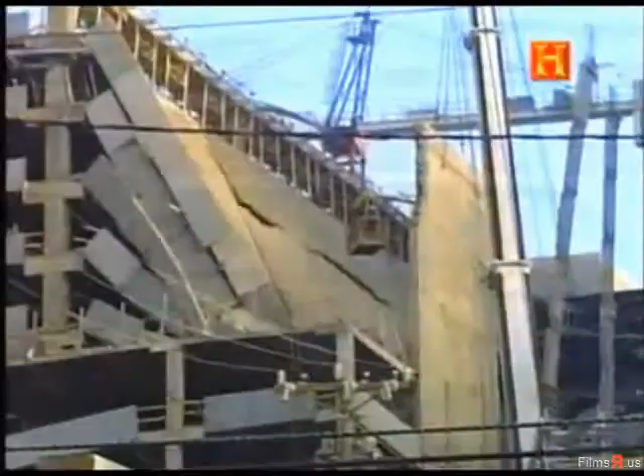A small town spontaneously combusts. A tanker explodes, taking lives and leaving ecological disaster in its wake. A parking structure mysteriously collapses. The dream project of a Soviet strongman turns into a nightmare, and a cloud of gas leaves a landscape of death. Now, engineering disasters.

January 17th, 2001, dawned chilly in the city of Hutchinson, Kansas, a town of 40,000 located near the geographical center of the United States. Then, all hell broke loose. Two buildings in the heart of town were slammed by an explosion and burst into flames, the force shattering glass a block away, and the flames sending smoke twisting over the city.

One store manager will never forget that day. The last thing I remember was like a rumble, like thunder, and I looked up and the ceiling tiles were all falling down. The next thing I knew, I heard sirens. I was buried in it. When we came back, we were still in shock, couldn't believe that it had happened. Our building wasn't there. There was just a huge geyser of a fire, just out of control.

As firefighters worked to douse flames that reached as high as 70 feet, city officials could only guess at what might have caused the explosion and fire. We thought it was just a normal explosion due to, it was cold that day, that maybe some furnace malfunction and there was a leak in the gas.

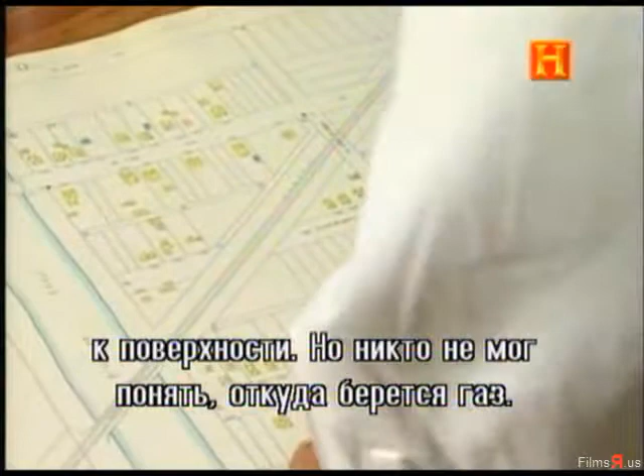But no one knew where the gas originated. We were plotting the wells that were flaring up to see if there was a pattern, if they would form some kind of a line to show us where the source was at. And it indicated to us it looked like there was a source maybe coming from the west of town.

Outside Hutchinson is the Yaggy gas field, an underground storage facility. It's one of the hubs in the national gas storage and transportation system. There are fewer than 24 of these hubs around the country, so they're very critical parts of the natural gas infrastructure. Gas comes in by pipeline, and then it's sent from here out on distribution lines all over the Midwest, connecting up with the national grid.

The Yaggy storage field, which holds about 3.5 billion cubic feet of gas, was first developed in the late 1970s to store liquid propane at low pressure. At that time, engineers created about 70 long-necked gas storage holding areas, known as jugs.

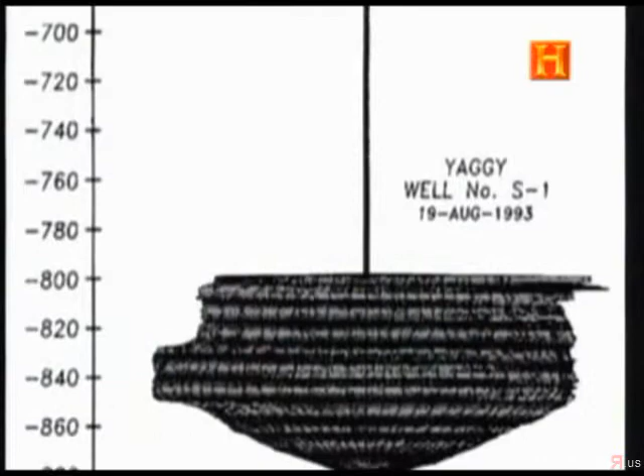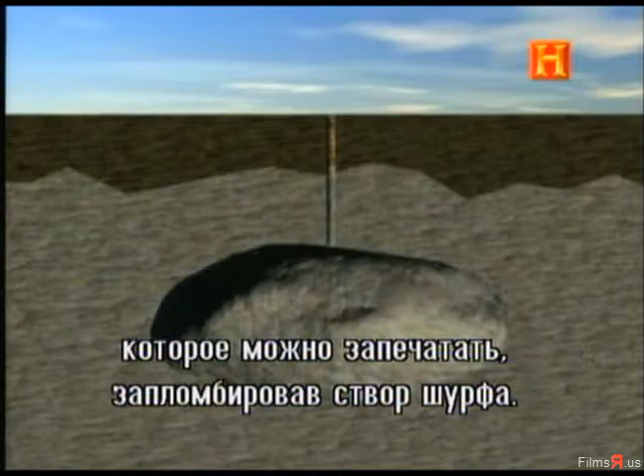To create a jug, engineers drill about 600 feet down into the salt deposit and then use water to dissolve the salt and make a man-made cavern. Then the water is pumped out, leaving a stable storage place that can be sealed by cementing around the well casing. These things are large enough to hold about 100,000 barrels of fluid, 42 gallons per barrel. That's 4.2 million gallons of fluid in one of these jugs in the salt.

About a decade later, the company that made the jugs went out of business, and the local gas company converted the facility to hold natural gas at high pressure rather than liquid propane at lower pressure. The change was significant because higher pressure storage requires that the jugs are perfectly sealed in order to prevent leaks.

Investigators believe that just before the explosions in Hutchinson, there was a pressure drop in the gas stored in a jug designated S1. This suggested the gas had exited the jug, but investigators still needed to know where it went and how it might have traveled the 8 miles to Hutchinson.

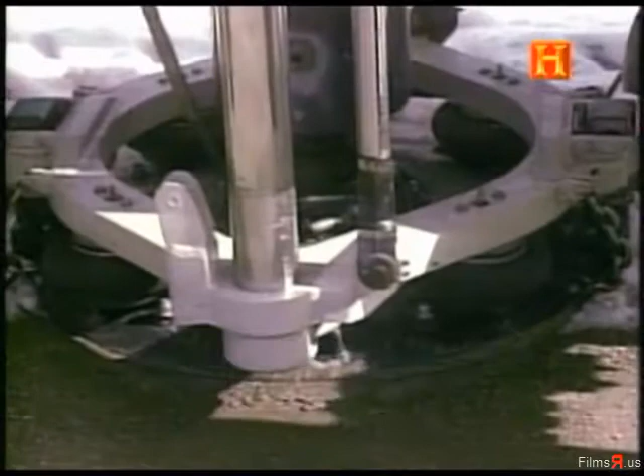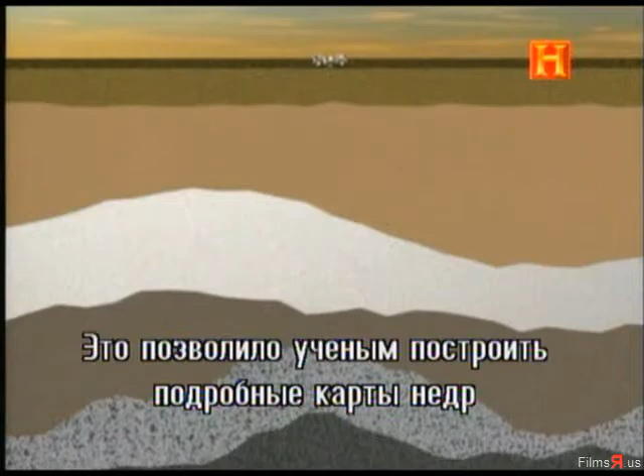To answer that question, geologists from the Kansas Geological Survey deployed what are known as seismic thumper trucks to create maps of underground conditions. A thumper truck works by literally thumping the ground to send shock waves into the earth. These are bounced back to the surface with varying degrees of intensity, depending upon the nature of the material they encounter below.

This enabled scientists to make detailed maps of the region between the city of Hutchinson and the Yaggy Field facility. Right here it looks fairly flat, but underground, 600 feet down, the rocks are dipping, slowly inclining towards the city of Hutchinson. Natural gas gets out into those rocks. It comes out of the well, out of the jug, hits that rock layer, and wants to find the highest place — it wants to rise to the top. So it found this rock layer, found a pathway, and headed straight that way for 8 miles right under downtown Hutchinson.

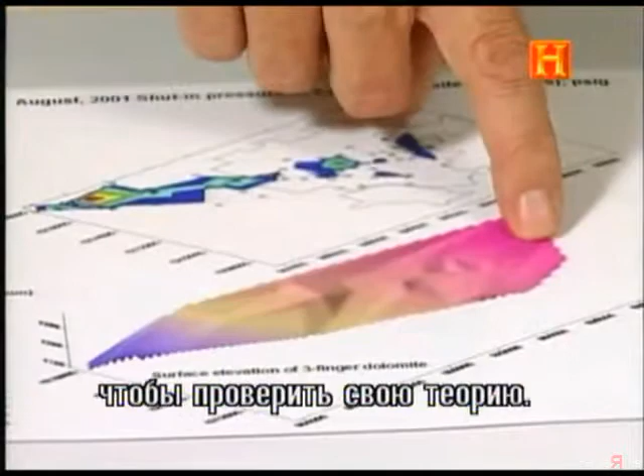Scientists generated geophysical maps of the underground pathway to validate their theory about the gas. They came to believe that the gas leak started in the S1 jug. To confirm this, investigators photographed the inside of the jug and discovered that the steel casing running down into the salt cavern was damaged, allowing the high-pressure natural gas to escape into the ground.

Investigators claim that even though there was a pressure drop at Yaggy Field, operators either ignored it or didn't detect it, and kept topping off the jug, keeping the high pressure constant.

While gas company engineers still seek other sources for the leak that ignited Hutchinson, most independent investigators agree that the Yaggy Field is the most likely origin.

The field is inactive now. Most of the gas has been distributed out in pipelines and sold to the market. There's about 20% of the gas left as a cushion at relatively low pressures to keep the system alive, keep the caverns open, and keep the equipment running, while the company decides whether they want to apply to reopen it. Following the Hutchinson disaster, state laws were passed requiring salt caverns to be built and maintained with higher safety standards.

There's also a concern that it happened once. We still don't know all of the things that went wrong, and there still may be other pathways for gas that we've never discovered. So I think there's always going to be a reasonable doubt in many people's minds about living uphill from a facility this large with this high pressure gas.

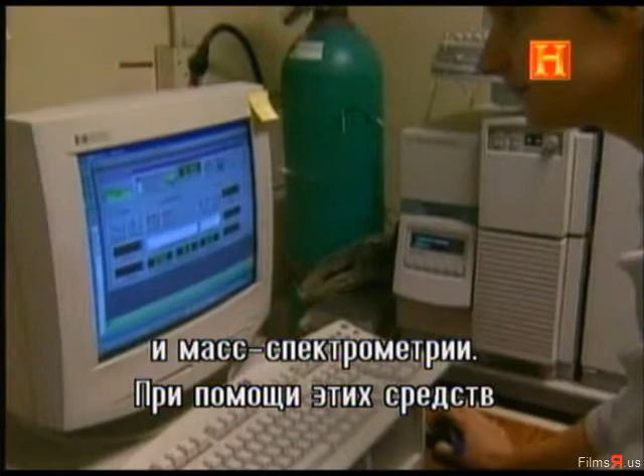There are several investigatory tools that are very powerful at identifying for us the very molecular and atomic constituents that led to that soot. The most powerful tools we find in this endeavor are some combination of gas chromatography and mass spectrometry. What these tools basically do is you take a complex chemical mishmash like soot, and you break it into its constituents so you can identify them individually.

The analysis revealed that one of the compounds involved was caustic soda. By itself, caustic soda is not explosive. But as investigators would learn, it leaked from the holding tank, combined with other elements, and formed a dangerous brew.

Investigators went inside and found a hole at the top of the tank, a problem they believed occurred because one of the welders who made the tank didn't seal the seam completely. The hole burned through the tank was actually easier to find than you might think, because large expanses of a tank wall are just flat, featureless.

If you're in this business very long, you recognize that problems in workmanship don't typically come up in long, straight areas that are easy to weld. Problems in workmanship usually manifest themselves in complex, cramped geometries around corners and struts, in a place that's not so accessible and not so easy for the workman to see his work.

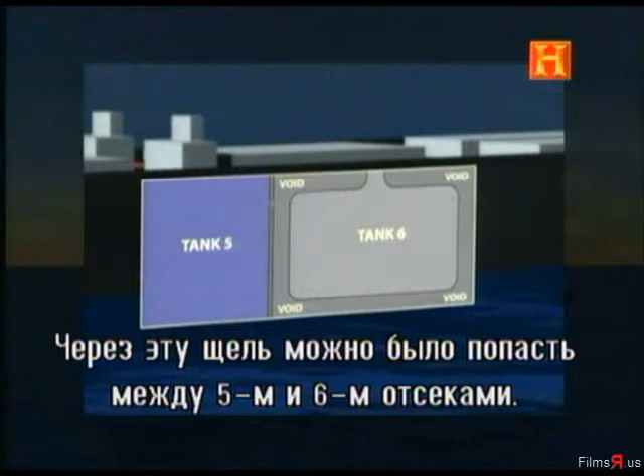The hole in the tank was enough to provide passage into a void area between Tank 5 and its neighbor, Tank 6. Eventually, the bilge space became filled with a soup of caustic soda from a preceding voyage. This caustic soda soup combined with a zinc coating used in the bilge area and formed hydrogen gas. Then the hydrogen exploded, ignited by a spark of unknown origin.

If hydrogen finally builds up in concentration to its lower explosive limit, it will find an ignition source. Remember, this is the same stuff in the Hindenburg. So we have this incredible conjunction of events. And indeed, in our business, we see that major disasters are very often the result of a string of very low probability events that just all come together bad that day.

The Puerto Rican tanker explosion had implications for the U.S. Coast Guard, which improved its response to hazardous materials spills.

And although authorities acknowledge that the explosion was a freak accident, the disaster did create change in the shipping industry. The Marine Board of Investigation suggested that there were preventative measures that could have been taken to prevent this explosion in the first place. Better inspection techniques, perhaps during the yard period, or other opportunities the vessel had to be inspected, may have found this gouge and it could have been repaired.

You've got to start looking for things like if volumes of cargoes start disappearing during voyages, and in this particular case they were. This cannot go without some affirmative action. Indeed, it would be very straightforward to determine you've got a leak because cargo is showing up in the bilge water. If those determinations had been made, the leak would have been located. It just would have been a matter of time.

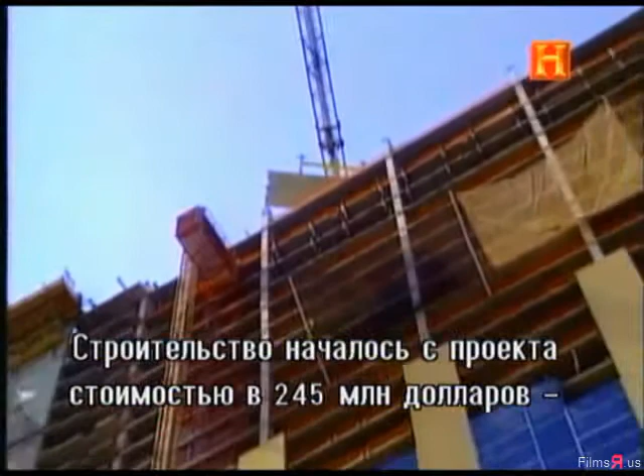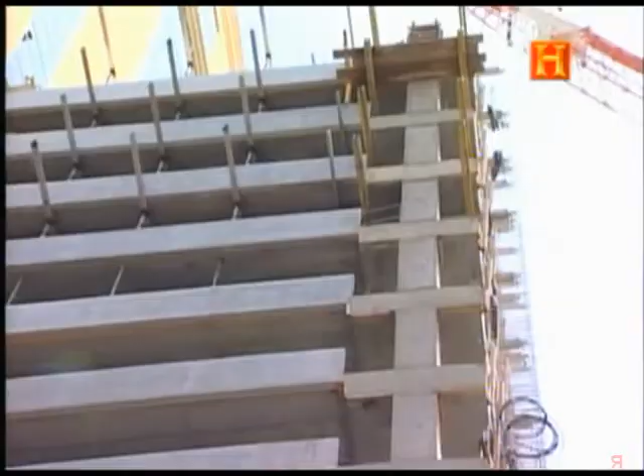The Tropicana organization stepped in with a new development intended to lure more gamblers to the Jersey shore. Construction began on a $245 million project, a new 18-story hotel next to the Tropicana Casino, as well as an attached 2,400-space parking structure. It was one of the biggest projects in Atlantic City in a decade.

Local officials and Tropicana executives were saying how big this is going to be for the area. It's going to be the largest hotel in the state of New Jersey. It's going to bring jobs to the area. It was of critical importance to the city, the state, and the casino. It had the economic fortunes of workers and businesses tied to it.

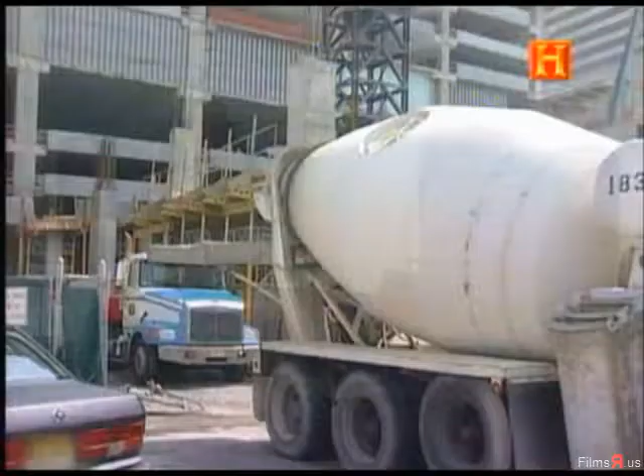Feeling the pressure, contractors put the Tropicana structure on a rush status to complete the work by March 2004. On the morning of October 30th, a work crew was 8 parking levels up, preparing to pour concrete.

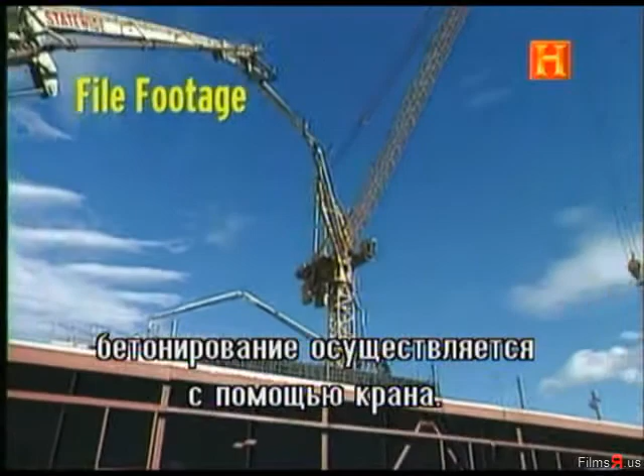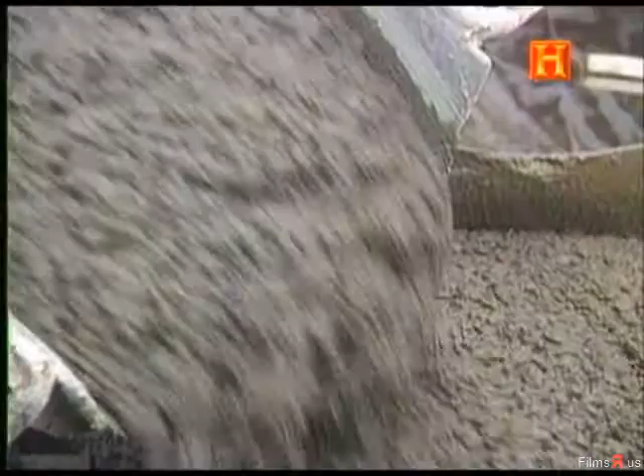On many construction sites, this is done by means of a crane-mounted hose. In the old days, workers would haul up concrete in buckets or wheelbarrows. It's become much more modern these days. It's pumped: a pump takes it up through a tube and then out through a hose, so you could place it 8-9 floors high. Wet concrete puts great stress on structures.

In the case of the Tropicana, engineers estimate that stress rose to 160 pounds per square foot on the framed-out floor area while the concrete was being poured.

At about 10:40 in the morning, workers knew that something was wrong. They hear a noise and something shift. Some of the men have described it as just sort of looking at each other like, did you hear or feel that? And then everything begins to collapse and fall in.

Within moments, 5 floor slabs collapsed progressively.

They severed from a shear wall that remained standing after the collapse. When it cracked like that, I just went straight down. And it's like flying—I'm just floating in there, reaching, trying to reach for something.

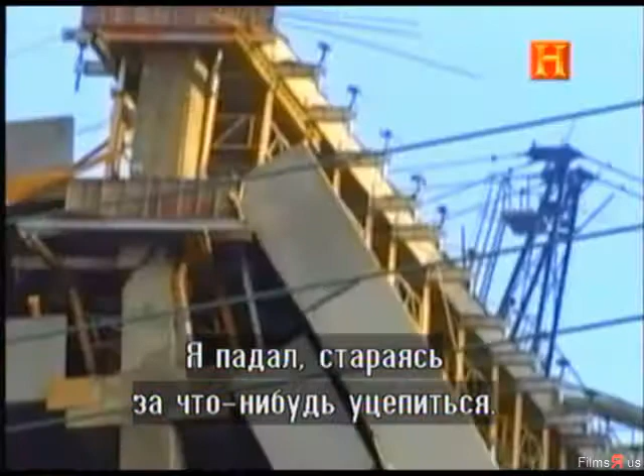Warren Webb rode the collapse down and was hospitalized with a severed hamstring, additional leg injuries, and a rotator cuff tear. Other workers were missing, however, and rescue personnel searched the collapsed structure for signs of life.

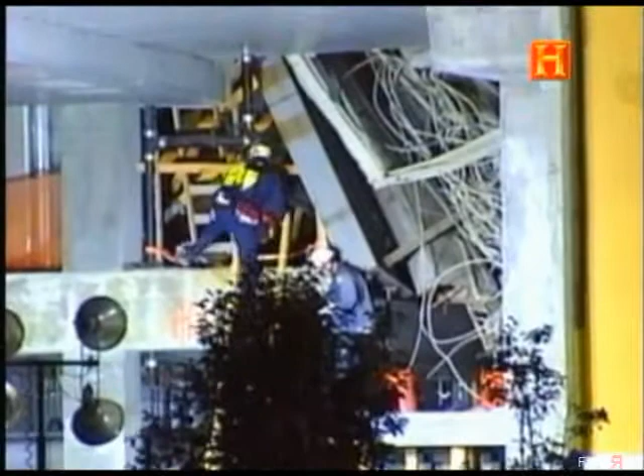When the last ambulance left the scene, the grim statistics were 4 workers killed, more than 20 injured. The reaction was intense. News stations carried it live.

Family members whose husbands or wives were working here flocked to the scene to make sure that their loved ones got out alive. But soon after the tragedy, reports emerged that at the parking garage there had been early signs of trouble. We interviewed 2 workers who had been inside the garage weeks prior to the collapse, and what they had noticed were large cracks in the columns, and they said they reported those large cracks to their supervisors.

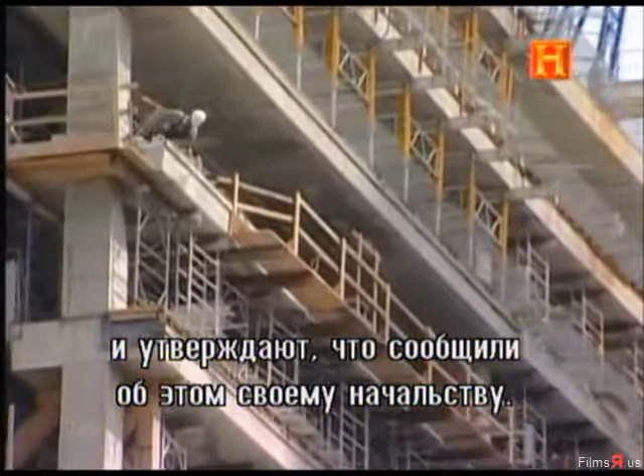OSHA itself, in its press conference announcing its citations, indicated that there were reports of several areas of cracked concrete on the construction project, and OSHA indicated that this should have raised what OSHA described as red flags for the people involved in the construction process.

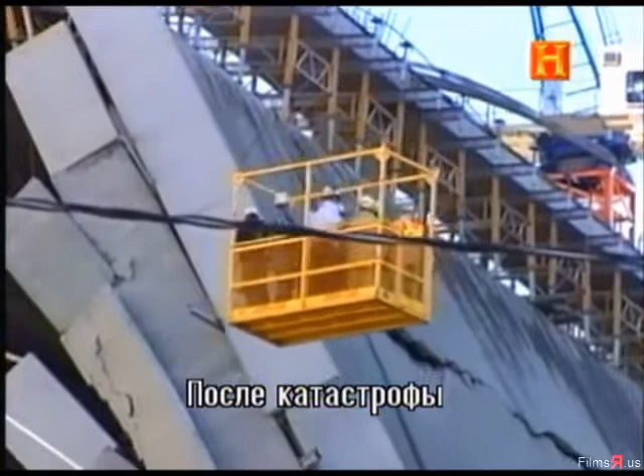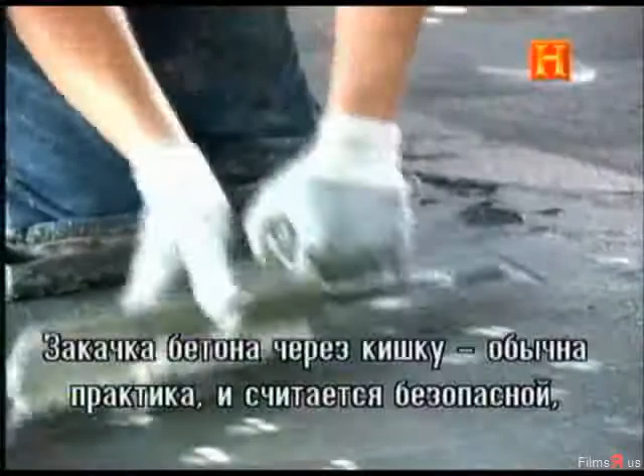In the days following the collapse, OSHA investigators and police sifted through the wreckage, looking for clues into how the structure failed. They knew the stresses created by wet concrete could push structures beyond their capabilities. The amount of stress it puts on the structure is enormous, because that is when the structure will be stressed the most. Pumping concrete through a hose is common and considered safe if done with proper structural support.

When the project began, iron workers on the lower floors were threading reinforcing steel, known as rebar, through the floor, and connecting the ends with additional pieces of rebar placed in the 6 vertical columns at the perimeter of the garage. That steel is literally getting tied together, and then when the concrete hardens, you have substantial steel rods coming in from either direction, tied together, giving you a great structural member that you could rely on.

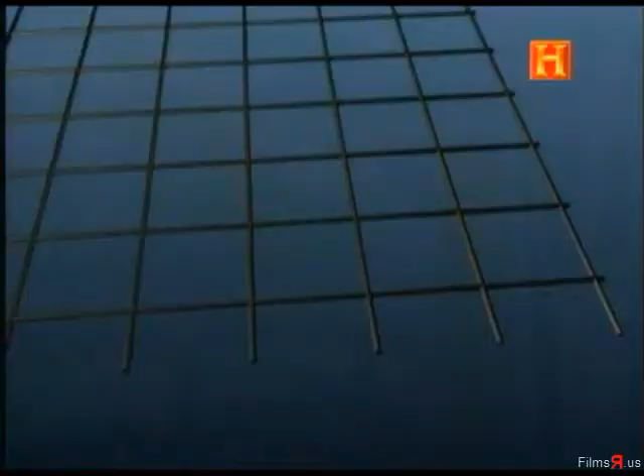But then, according to OSHA and lawyers for the Tropicana victims, the project plans were changed to allow for the use of a different kind of rebar fabrication. Rebar mesh is a waffle weave of metal that is prefabricated, pre-cut, and simply dropped in place. Obviously, the more you can do off-site and not in the field, the cheaper it's going to be. If you can eliminate rod setters tying pieces of rebar together, that's going to save you money—there's an economic incentive for companies to do that.

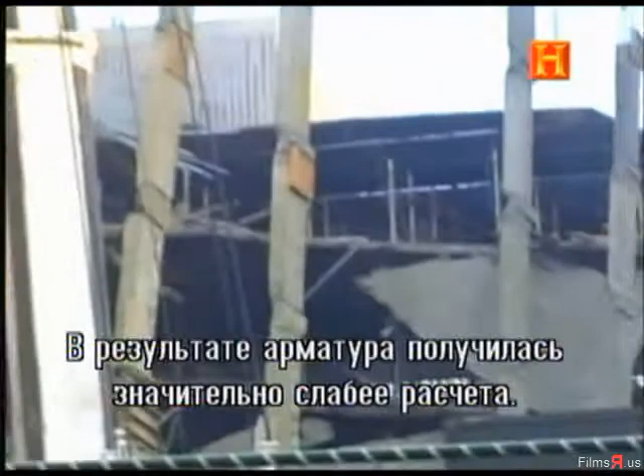According to OSHA investigators, the contractors also revised their plan for support beams, making them shallower and potentially weaker. Investigators say the unfortunate result was a structure that was substantially weaker than designed.

OSHA concluded that the accident occurred for 2 basic reasons: a lack of shoring and structural support, and a lack of connections between the floors and the walls. Connecting horizontal steel to the vertical is a basic construction engineering design. It's very basic—since the time of early man, once they started building structures, they knew that if you don't have the wall and the floor joined together, they're not going to be joined together for long.

On April 29, 2004, OSHA fined the participating contractors $119,000, and the contractors stated their intention to file appeals.

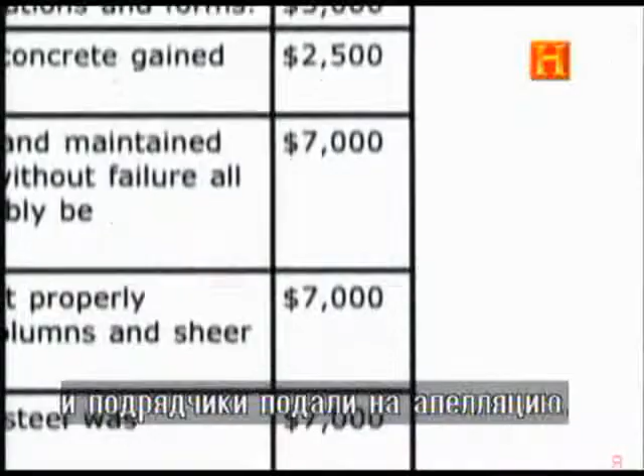Victims of the disaster believed the system failed them. We believe that if this job had been adequately inspected, this accident would not have occurred.

In the rush to build to a tight time frame, investigators believe a seemingly obvious principle of construction was ignored by the Tropicana's engineers. OSHA officials claim the walls and floors were not properly connected. That's why the OSHA director, in discussing this catastrophe, described it as a failure of basic engineering 101.

In Russia's great northwest, from the White Sea, an inlet to the Barents Sea, down to Lake Onega on the Finnish border, snow is on the ground for more than 160 days a year, and icebreakers are required to keep shipping lanes open in winter. This unforgiving landscape was an unwelcome home to an engineering project doomed to disaster.

In 1932, Russia was in the brutal grip of Soviet communism. The Soviet dictator, Joseph Stalin, was consolidating his power, rounding up enemies of the state in a process called collectivization. There had been mass arrests throughout the countryside and the cities of people who didn't want to cooperate with the new order, who didn't want to collaborate with the collectivization.

Stalin wanted to use the prisoners for propaganda purposes and decided to force them to work on grandiose public works projects. The first was the 140-mile-long White Sea Canal. It would allow for the strategic movement of Soviet ships and would create a new passage for commercial vessels. The canal was to extend from Povenets at the northern end of Lake Onega up to the White Sea, with its important port city of Arkhangelsk.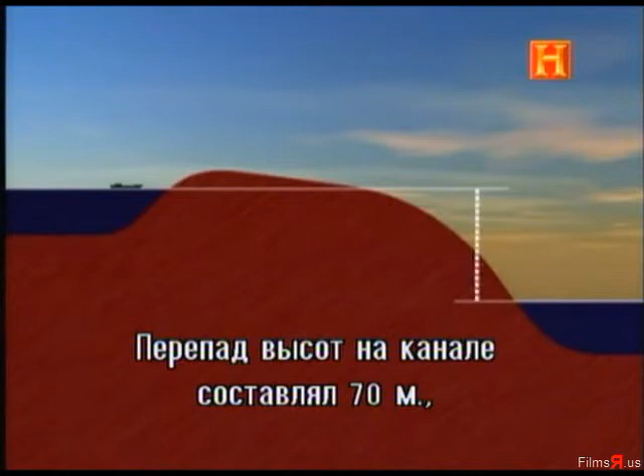The route had a 229-foot difference in water level. This required a system of 19 locks to raise and lower water levels so that ships could pass.

Stalin gave his engineers just 20 months to complete the job. Everyone involved with the project understood that when Stalin set a timetable, you better stick to it. The project would begin what became known as the Gulag system, with workers living in 9 camps along the route, working 16-hour days. The Gulag is a Soviet acronym which means the Main Administration of Camps, and it is simply a bureaucracy. It comes to be synonymous with the concentration camp system.

They had hundreds of thousands of people who'd been jailed. What should we do with them? Well, we can't use them on farms. Let's start them on this grand project.

While the intended purpose of the White Sea Canal was both military and economic, perhaps more important was its propaganda value. There were films made, books written, and newspaper articles done interviewing people who would say things like, I came into the camp as a hardened criminal and I emerge now as a good Soviet person.

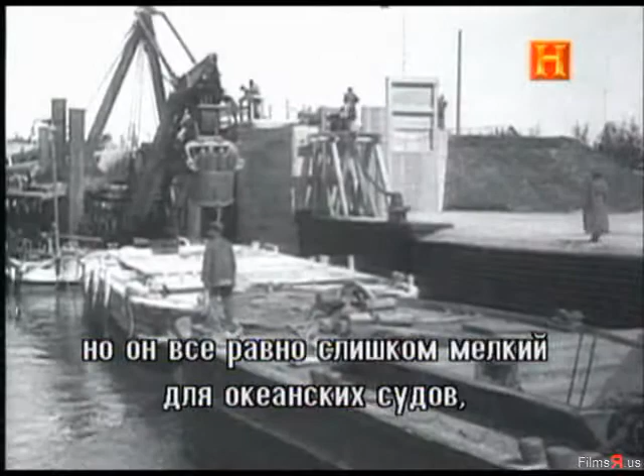After World War II, the canal was rebuilt, with better walls and metal gates over the locks. But it's still too shallow for ocean-going vessels, and receives light traffic today.

I myself went up there and I saw maybe 5 or 6 ships in the course of an afternoon, and I talked to some of the people who worked there and they said, oh yes, we get the occasional barge coming through, but it's never been of major commercial use or major military use.

A dictator's megalomania prompted poor engineering decisions that included forging ahead without a proper survey, working without proper tools or skilled personnel. And the Soviet supreme leader required that the truth about the disaster be concealed for decades. When Stalin died 20 years later, other Gulag projects were abandoned as hopelessly impractical.

It's abandoned, overgrown, choked with weeds. But amid rusting storage tanks and pipes that lead nowhere, discarded boxes of pesticide hold clues to one of the world's worst industrial disasters.

It happened on Monday, December 3rd, 1984, when the night air carried a toxic cloud. It was 400 miles south of New Delhi, in a city with a name that would become synonymous with tragedy, Bhopal, India.

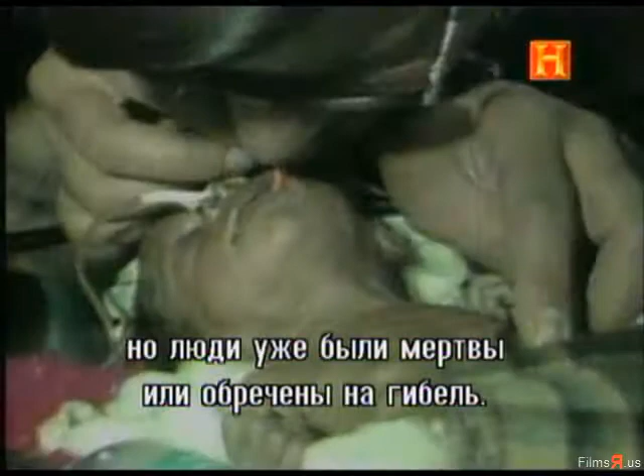In a shanty town surrounding a chemical manufacturing plant, residents had no warning that death was virtually upon them. Sleepers were jolted awake, choking on poison and rubbing their stinging eyes. By first light, the cloud had cleared away, and many victims were doomed or already dead.

Eventually, officials would report 3,800 fatalities, with 11,000 disabled with severe respiratory ailments.

We don't believe there was an alarm system in place at Bhopal, not a public alarm system. I believe there was an alarm system within the factory itself, but there was no siren or public alarm that would alert the surrounding population to the threat of any potential hazard from the plant. Bhopal plant officials, however, say they sounded a toxic gas alarm for about 5 minutes.

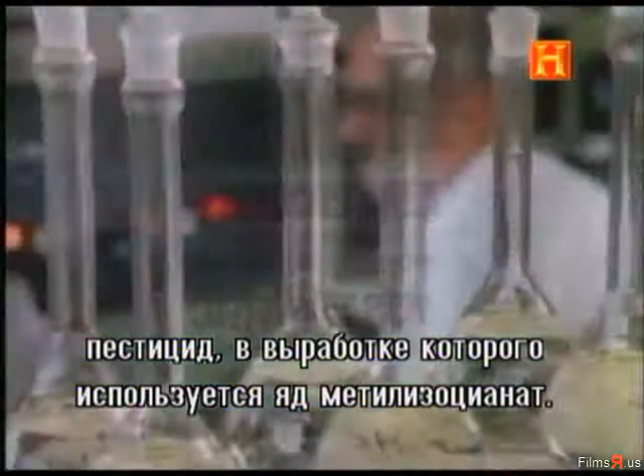The Bhopal plant was run by an Indian subsidiary of Union Carbide, a U.S.-based multinational corporation. The plant manufactured a pesticide called Sevin, using an extremely toxic chemical, MIC, methyl isocyanate. It was MIC that escaped that night and poisoned residents in their sleep.

In the 15 years the plant had been in operation before the disaster, there had been warning signs of trouble ahead, signs that may have been ignored. Accidents didn't happen each day, but they became fairly routine. Minor leaks of gas. There had been leaks of phosgene gas, which is also deadly, although not as deadly perhaps as MIC.

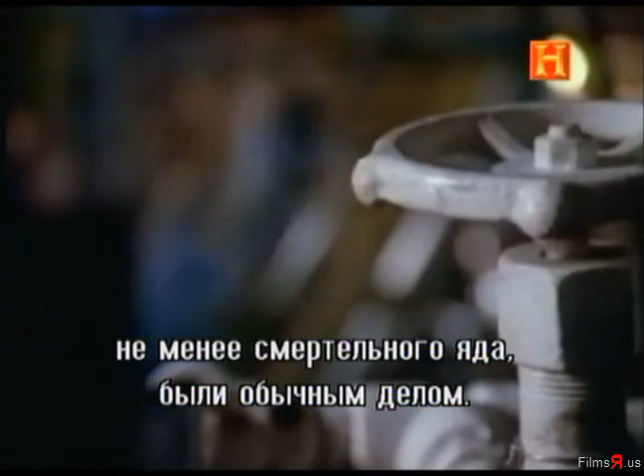After the methyl isocyanate tragedy, separate investigations were launched by the government of India, by scores of journalists, and also Union Carbide. Conflicting theories emerged.

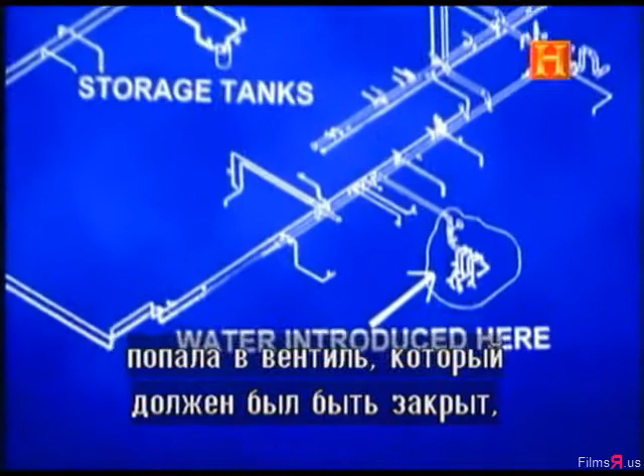One of the explanations is that the workers were flushing equipment with water. The water passed through a valve which was supposed to be closed but did not close all the way. Flushing with water, or water washing, was a normal maintenance procedure at Bhopal. At the time of the tragedy, the plant had been in standby mode for more than a month, not actively producing MIC because of the lack of demand for pest control in the winter.

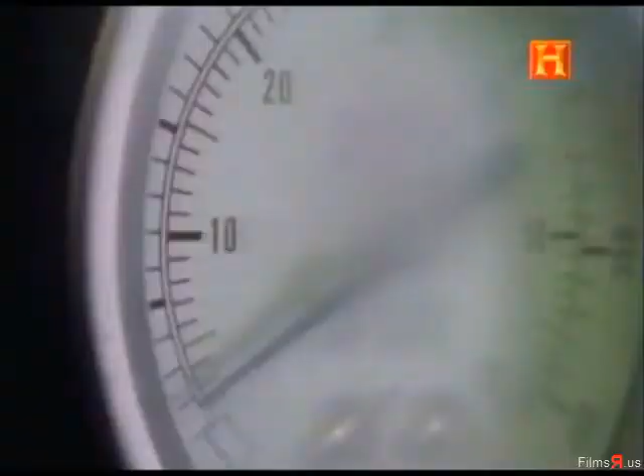We know that the water washing started something like 10:30 p.m. at night and continued till approximately 11:30. We know that this water washing was taking place. Common sense tells you that is the strongest possibility of how the water actually entered the tank.

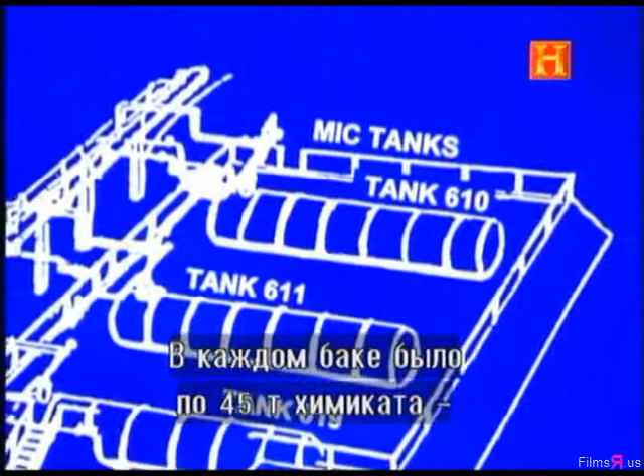Although routine, flushing the equipment can be a dangerous procedure because MIC reacts explosively when large amounts of it come into contact with water. The MIC tanks at Bhopal, 3 in all, were partially buried in the ground for stability. Each tank held about 45 tons of the chemical, making the plant among the largest MIC storage facilities in the world.

When this reaction took place, within that storage tank number 610, it took place with such an explosive violence and force that the concrete tank literally lifted up, rupturing the concrete casing and broke through the surface.

The Indian government's investigation found that when the MIC reacted, 27 tons of poison vapor and 14 tons of reaction byproducts were sent into the air for at least 90 minutes.

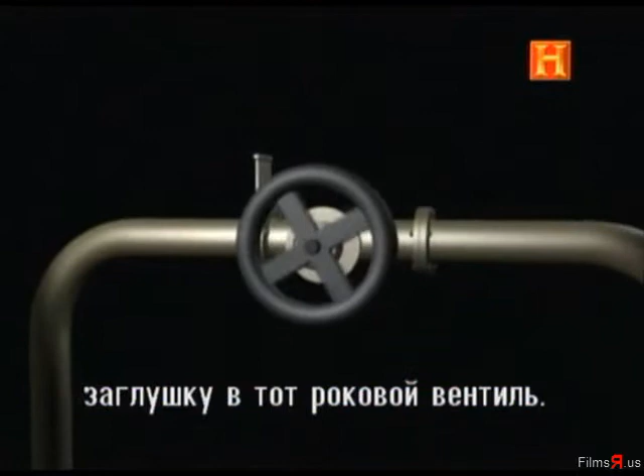Indian government investigators believe that a Bhopal plant worker failed to follow a safety procedure and didn't insert a piece of metal called a slip blind into a crucial valve. A slip blind would slide in, basically forming a solid wall in the pipe. It would not be possible for water to get past a slip blind.

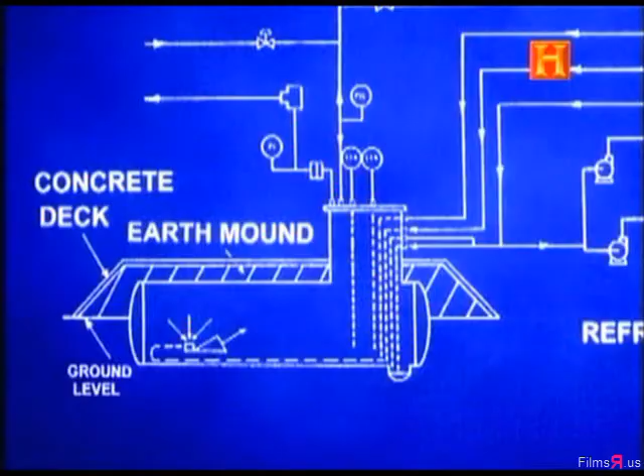The Indian investigators also believe that the reaction was worsened because valves were poorly maintained and became clogged. These valves would have allowed the water to drain harmlessly away from the tank. They also pointed out that the cooling unit that serviced Tank 610 was turned off, making the MIC inside even more reactive.

In contrast, Union Carbide's investigators came up with a different explanation for the Bhopal disaster. While they too believed the core problem was water contamination, they theorized that a disgruntled employee introduced water into the tank. This is exactly the kind of candidate who would have committed a particular act intending one result and yet causing another, in the sense of intending to cause mischief or spoil a batch of MIC by introducing water, and yet not fully appreciating the consequences of his act.

Journalists pointed to a larger systematic pattern of failures concerning the plant's site location, design, and day-to-day operations. A lot of people want to reduce this to 'some guy opened a valve and he shouldn't have.' But that's not what happened. First of all, this whole plant was designed incorrectly. It was a time bomb waiting to explode.

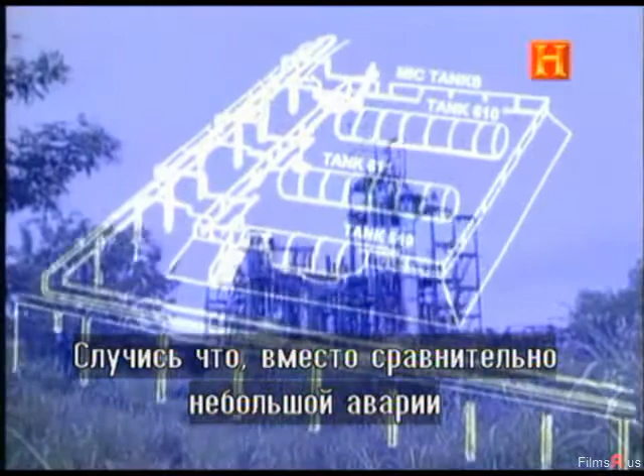Number one, methyl isocyanate, a very deadly chemical, was used. The other decision that was made that's very crucial is that MIC was stored in very large tanks. Therefore, if something went wrong, you had a massive disaster instead of a bad accident, but not a massive catastrophe.

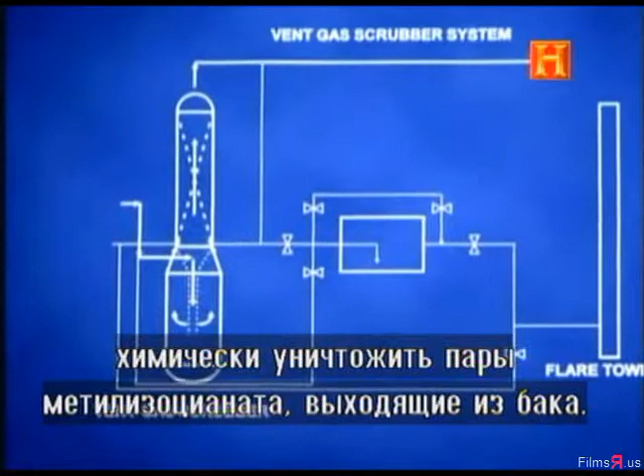A comprehensive review of Bhopal investigations was initiated by a group of chemical companies, including Dow Chemical, which acquired Union Carbide in 2001. The group, called the Center for Chemical Process Safety, emphasized in its review that crucial equipment at the plant was not working because of poor maintenance or was just not turned on. The equipment included a device called a scrubber that could have chemically destroyed the MIC gases as they spewed from the tank. The scrubber was not operating that evening.

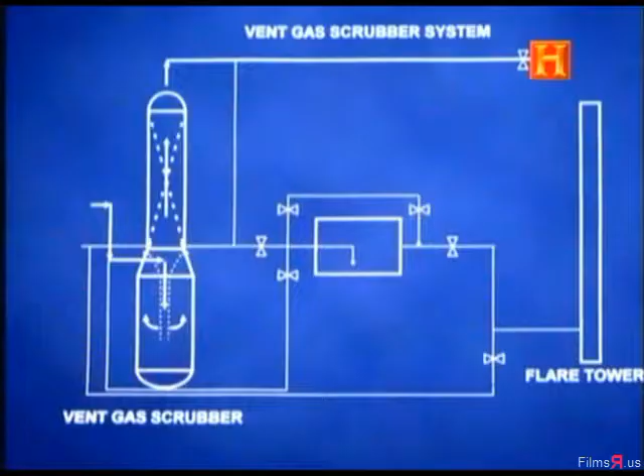It could have been turned on. It was possible, but during the course of the event, the operators did not turn it on. Past the scrubber, there was also a process flare, which could have burned off the MIC that was being emitted. But the process flare was also not operating that day. So there were a number of safeguards that could have and should have been in place, but they were not. The Center for Chemical Process Safety's review suggested that the disaster proceeded from a cascading series of failures, originating in the way the plant was run.

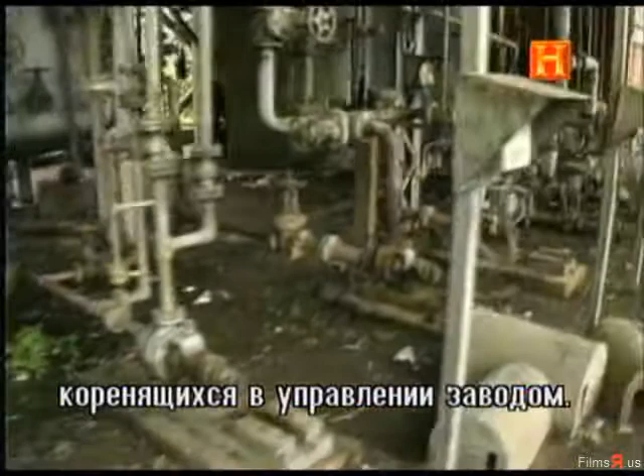You have to go back to the root cause, and in a case like this, I believe it would be typical to find that there was some kind of management failure that sits at the root cause of the problem. That may not be the only root cause, but it certainly is likely to be one of them. If any one of these measures—for example, the design of the plant, the design of the safety systems, the effort to maintain the plant, the effort to turn on the safety devices—if any one of these had been done, it would have contributed greatly to minimizing the kind of damage, death, and destruction that resulted from the gas leaks.

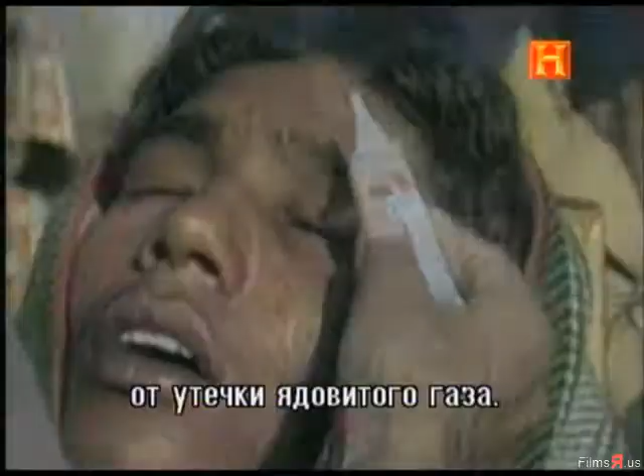Union Carbide paid a $470 million settlement to the government of India. But legal delays, including identifying some of the victims, have slowed the payout rate to a crawl. The release of the poison gas over Bhopal became an even greater disaster because of the close proximity of slums built up around the plant.

Some health investigators estimate that since the disaster, as many as 50,000 people have sustained significant respiratory injuries from exposure to airborne and waterborne poisons. Bhopal has forced chemical plant designers to find ways to safely store MIC. Today, plants that use MIC employ auxiliary emergency dump tanks, which can be used to divert large amounts of the chemical away from contaminated areas.

Two decades later, the city of Bhopal is still a toxic site, with scientists documenting widespread contamination of groundwater supplies. It is a tragic legacy to an incident that experts acknowledge was the worst industrial disaster in history.